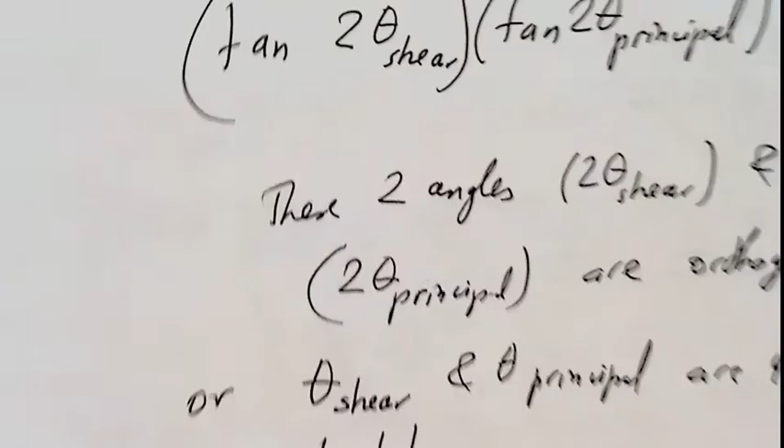We take an element. An element is under plane condition, meaning all stresses are in one plane: sigma x, sigma y, and tau xy. They are in one plane. Then tau maximum equals, in terms of initial stresses sigma x and sigma y and tau, the square root of sigma x minus sigma y over 2 squared plus tau xy squared.

Now, a student was wondering that this was not, as I did in lecture 21, half the difference between principal stresses. But if you go just to the next page, from page 2020 to 2021, I wrote maximum stress in that condition and minimum stress.

And I suggested, let us calculate for fun. You may say, okay, this is not fun, but let us calculate this: sigma first minus sigma second. I did not write sigma 1, sigma 2 -- sigma 1, sigma 2, sigma 3 are reserved for principal stresses in space.

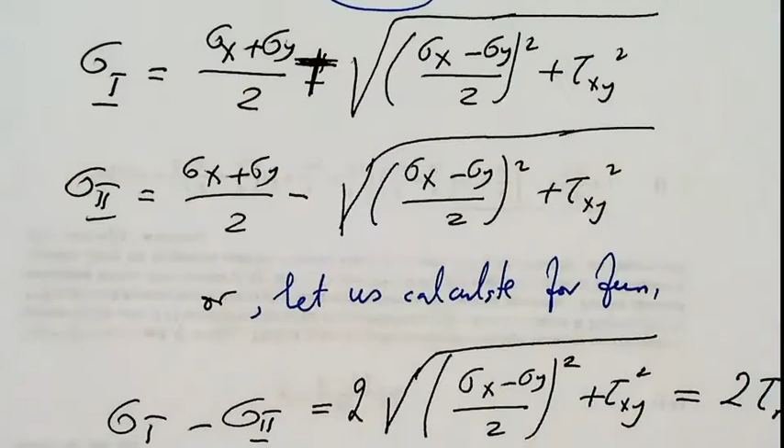So sigma first minus sigma 2 equals this, minus times minus, this will be 2 times this expression. But 2 times this expression is 2 times tau max that was obtained on the previous page. So tau max equals sigma first minus sigma 2, divided by 2.

Second question that was discussed: a project question. Was, do I need determinants in problem 1 of project 2? Or maybe, just maybe, there is another way. That is the question.

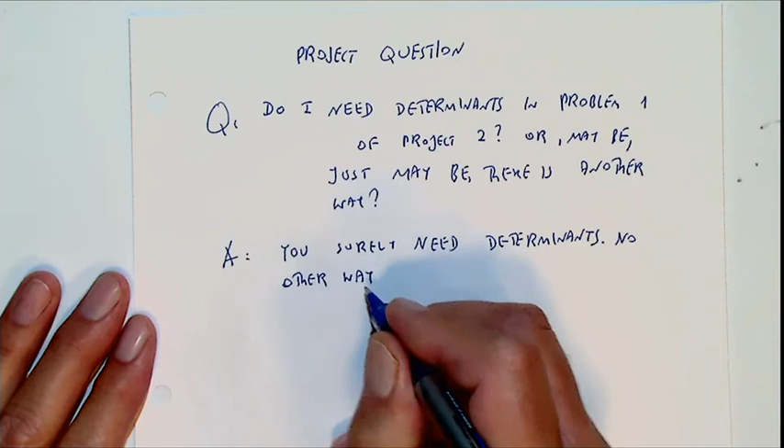Answer: you surely need determinants. No other way known to me. Of course, one can try the method of substitution, the method of expressing one unknown through others. But this is a tedious way.

Good for determinants: good for 2x2 equations, or 3x3, or even 4x4. That is for an experienced person.

But not for 8x8 determinant. Okay, why 8x8? Another question, so it's question 2. It's question 1.

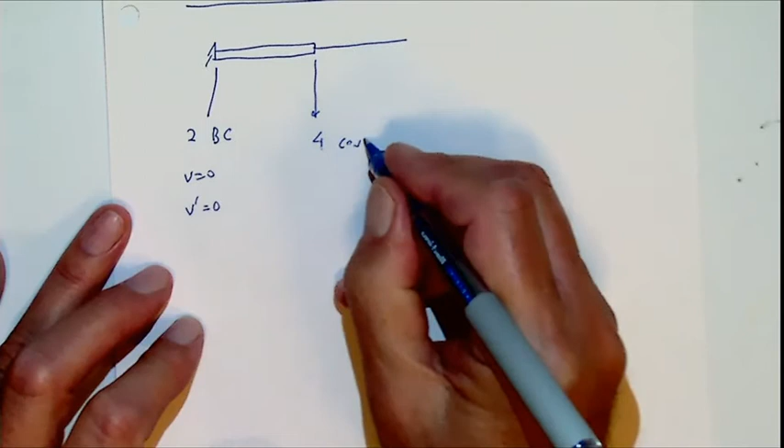Here we have 4 continuity conditions. That is V on left equals V on right. Then V prime, that is continuity of displacements. I will write down continuity of displacements. V prime left means to the left of this cross section, just V right, continuity of slopes.

Then, let us imagine this is EI1, and that is EI2. Then continuity of shear forces, EI1 V third derivative equals EI2, V left, V right, third derivatives, continuity of shear force.

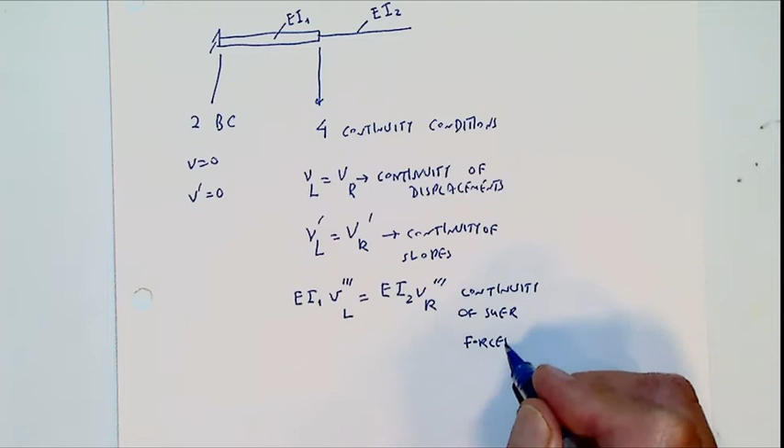Then EI1 V left double prime equals EI2 V right double prime. Continuity of bending moments.

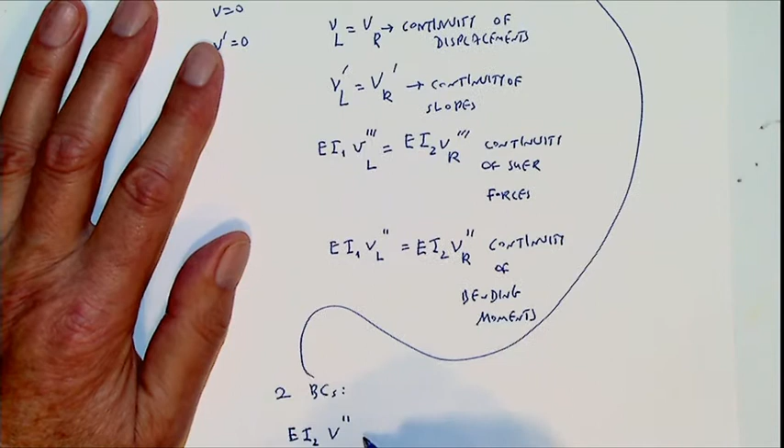So the 2 plus 4 is 6. Now we have here conditions, boundary conditions, 2 boundary conditions. And that is bending moment equals 0. EI2 V double prime, so that is at L, equals 0.

And then effective shear force equals 0. And that is EI2 V triple prime L plus P V prime L equals 0. Don't forget this term. I used it for free end.

So in total then we get 8 conditions. In total, 8 equations with 8 unknowns.

Okay, a question, how to evaluate, okay, before that, how to proceed? Assume I know how to evaluate determinant. For a moment. You may say, come on, I cannot assume that, but assume for just one moment.

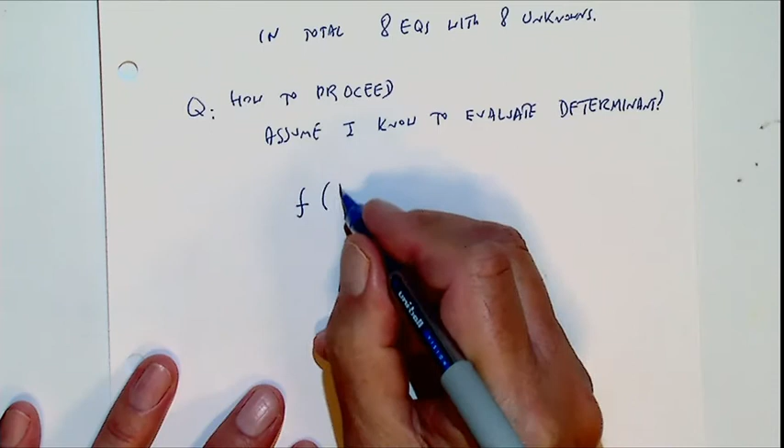Okay, so this whole determinant, let us call it F. Unknown is P. So what we have to solve is this is our equation. How to solve it?

Graphically. So I take this, that is P, that is F of P. So I evaluate determinant for P1, let us say P1. So that is P1, you take your value, okay? So then I evaluate F(P1).

Imagine that is positive. Then F(P2), that is P2. F(P2), imagine that is also positive. Then P3.

Imagine that is negative. That means that curve behaves, it's not important how it behaves, but main thing is that it crosses this axis. Okay, once you found this P2 and P3, then my recommendation is then to these intervals that you have to cut by 2.

Okay, then imagine this average. Calculate there, that is P4. Calculate F(P4). If it is negative, that means that root is to the left, etc. Then you proceed and you find this root. So that is graphical solution.

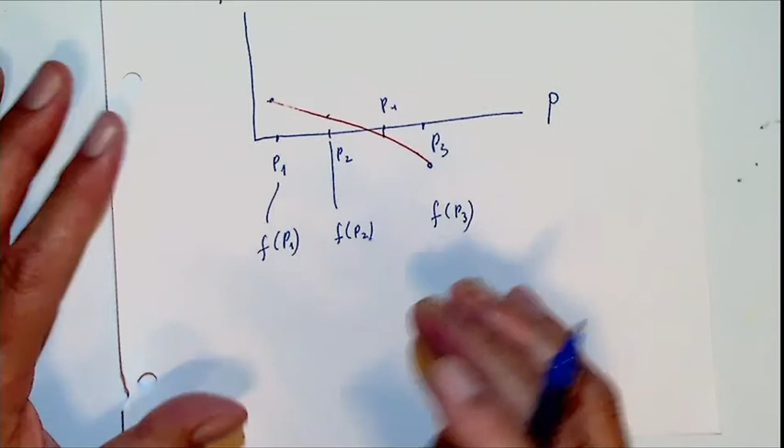Now you need to choose P1. Everyone chooses as he wants or she wants. Now how to evaluate determinant? Main question.

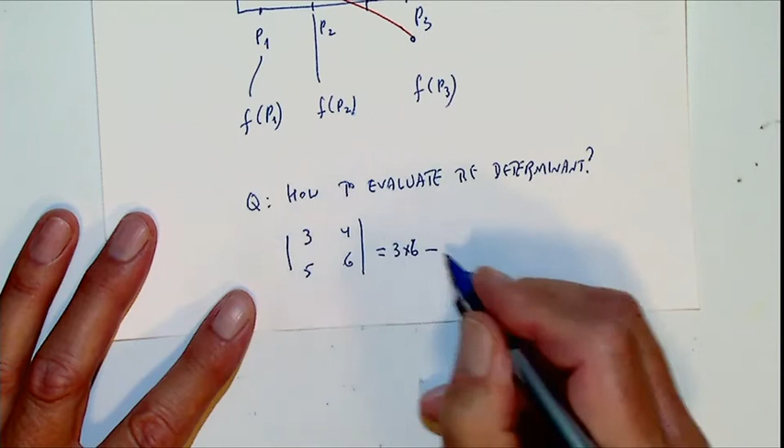Okay, we know, of course, how to evaluate determinant when we have a 2 by 2 determinant. Okay, 2 by 2 we know. 3, 4, 5, 6, so that equals 3 times 6 minus 4 times 5. We also know how to evaluate determinant that is 3 by 3.

1, 2, 3, 4, 5, 6, 3, 2, 1. So then we are using Sarrus' rule. Okay, so this on main diagonal 1 times 5 times 1. Then this plus 2 times 6 times 3. Then plus this one plus 4 times 2 times 3. Then minus terms, these ones. 3 times 5 times 3, etc. Then these ones. But what about 4 by 4, and 5 by 5?

Or 5 by 5? So we go to His Excellency computer.

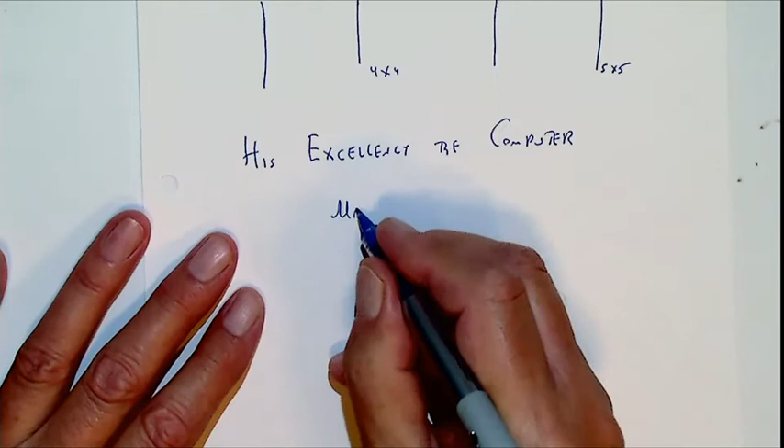Two ways, MATLAB. So you evaluate, you choose P1, go to MATLAB, evaluate F(P1), and you put on your figure. Okay, so F(P1) by MATLAB, F(P2) by MATLAB, etc.

Okay, if you want, you can also evaluate via Maple. You can say, come on, I did not study Maple. But it is easy as 1, 2, 3.

You are using help in computer within Maple. FAU has Maple everywhere. On your private laptop, it may not exist. You should go through FAU. And you are using help, you can study this in half hour. I'm promising you. And once you will learn Maple, you will never give up. But MATLAB is also as good.

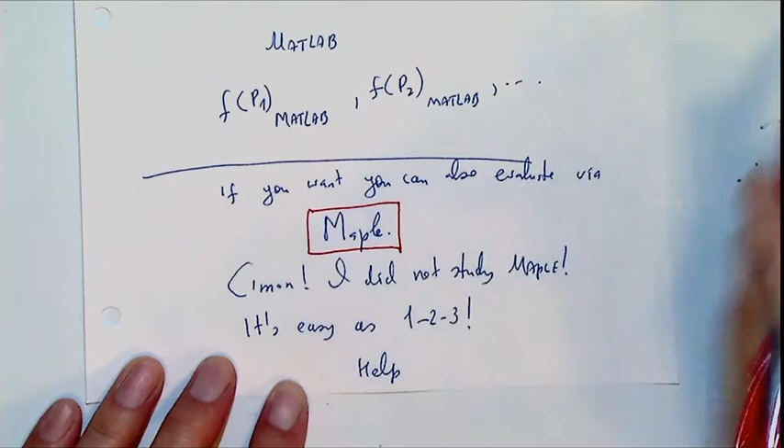Thank you. I answered these 2 questions that there were. I will put these answers also at the end of my lecture notes, I will add this, okay? At the end, not in the beginning, despite the fact that I'm doing it in the beginning. Otherwise, some people maybe don't need this explanation, and therefore, I do not want to start with this, and they may find that maybe I did not give the lecture or something like that.

Okay, so we go to 21.

So we had 21. I think we covered 17 pages, 21, 17. Okay, let me show you this. I think we covered until page 17, 21, 17, which is the second theory of strengths.

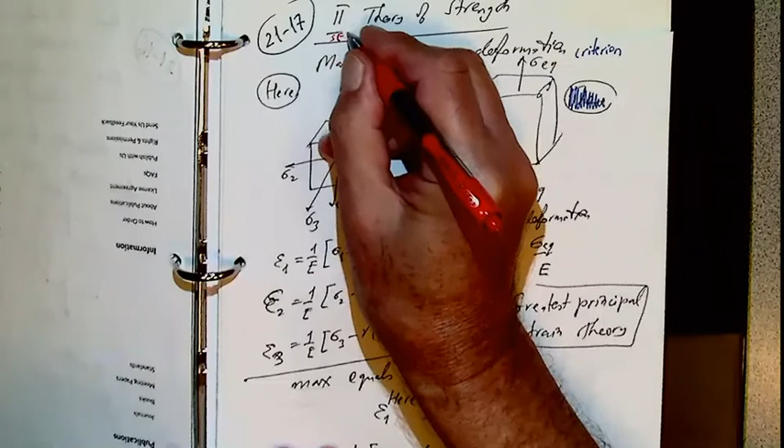Maximum linear deformation criterion, okay? Again, second criterion. I wrote this specially to again give up this notion that it is a theory. It is a criterion, it comes from the head of someone. I will give you later, towards the end, historical background of who gave what, just for you to know. Also, it is good for this knowledge to be exhibited to your boss when you are working in the company. It develops a culture in the company of knowing who did what and where it comes from.

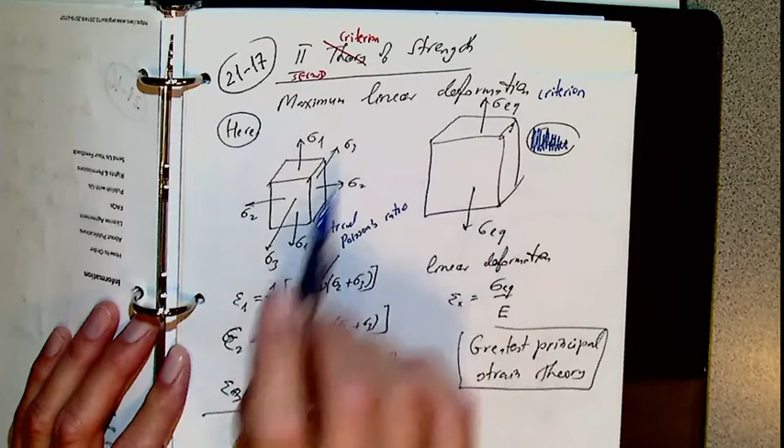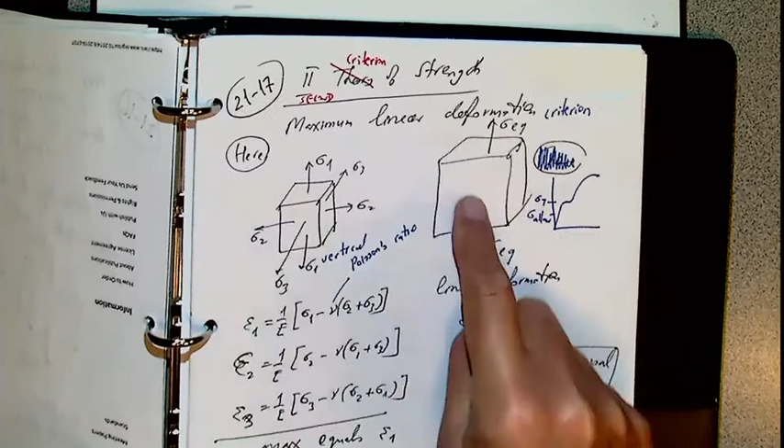So we have this situation where we have principal stresses: sigma 1 is vertical, sigma 2 horizontal, and sigma 3 also horizontal. Now, do you remember, we say that is our hypothesized state in uniaxial direction. In uniaxial direction we know from experiments, we conducted experiments, we know sigma yield, and we know that is sigma allowable, through safety factor. So what we say, according to this theory, maximum linear deformation in this element and maximum linear deformation in that element are equal.

So in direction 1, we have epsilon 1 equals 1 over E times sigma 1 minus nu, Poisson's ratio, times sigma 2 plus sigma 3. Then epsilon in direction 2 equals 1 over E times sigma 2 minus nu times sigma 1 plus sigma 3. Epsilon 3 equals sigma 3 minus nu times sigma 2 plus sigma 1.

But this is maximum of all, because sigma 1 is the biggest of sigma 2 and sigma 3. So epsilon 1 here equals epsilon 1 there. So 1 over E times sigma 1 minus nu times sigma 2 plus sigma 3 equals sigma equivalent over E. From here we get sigma equivalent: sigma equivalent equals sigma 1 minus nu times sigma 2 plus sigma 3.

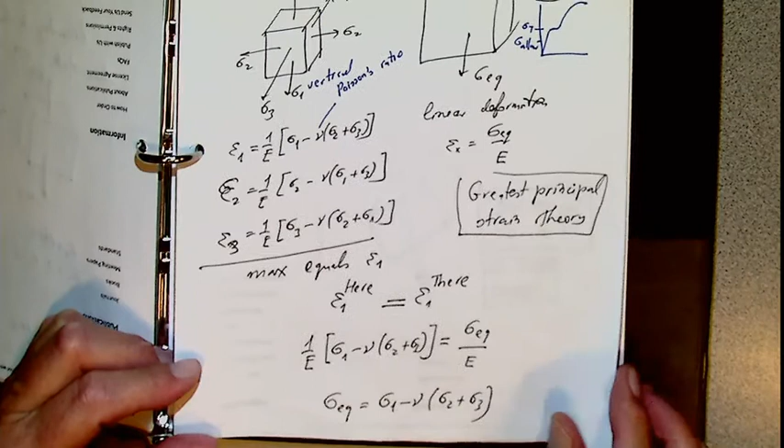Okay, now principal stresses, let me show you again, just for explanation, principal stresses. In the original axis we have various stresses, and I left this out to fill now. So there is sigma z, sigma x, sigma y, then there is tau.

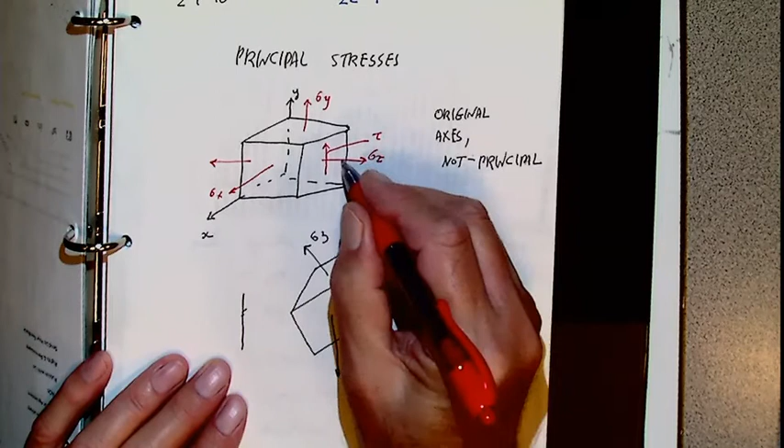Tau is shear stress. First index gives what face this is perpendicular to, that's z. Second index is direction, that's y. Then there is another one, tau again z but in x direction, etc. So there are many stresses. We can show that if we rotate the coordinate system, there will be some coordinate system where shear forces will not be present.

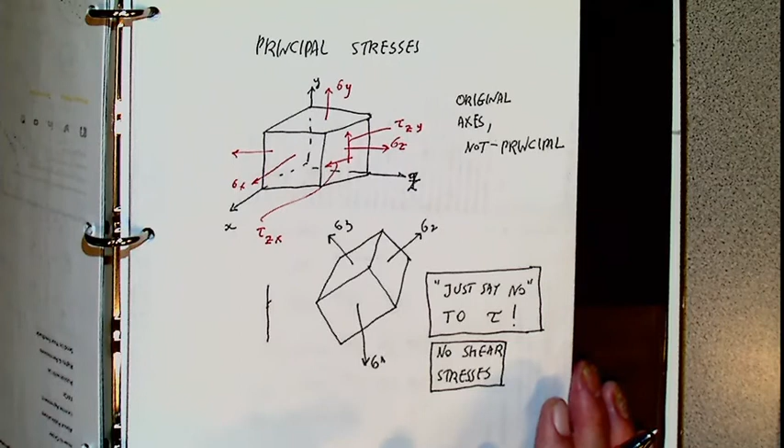Okay, so sigma 1, sigma 2, sigma 3, shear forces are not present. Just say no to tau. That is like Shakespeare's Romeo and Juliet: two families, Capulets and Montagues, are enemies of each other. Romeo is not invited to Juliet's party. So here, just say no to Romeo, or tau. So no shear stresses here.

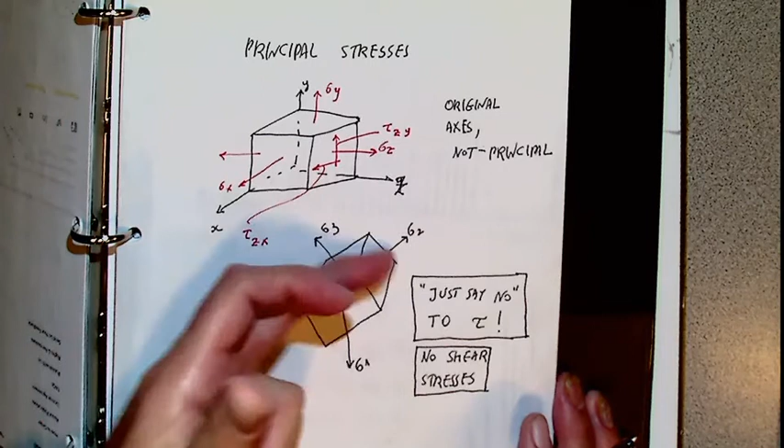Then we have only normal stresses, sigma 1, sigma 2, sigma 3. They are called principal stresses, and the biggest principal stress of them is sigma 1, smallest is sigma 3, whatever is left is sigma 2. That is 22,1. Okay, then 22,2.

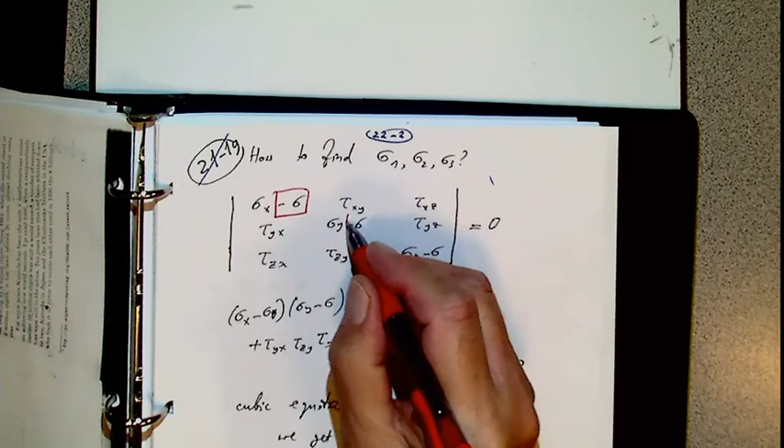How to find sigma 1, sigma 2, and sigma 3? Pay attention. In the original state we have sigma x, tau xy, tau xz, tau yx, sigma y, tau yz, tau zx, tau zy, sigma z. So what we do is subtract sigma from the diagonal elements and consider this determinant. So then we get a determinant - see, determinants show up again, like Romeo showing himself at Juliet's party.

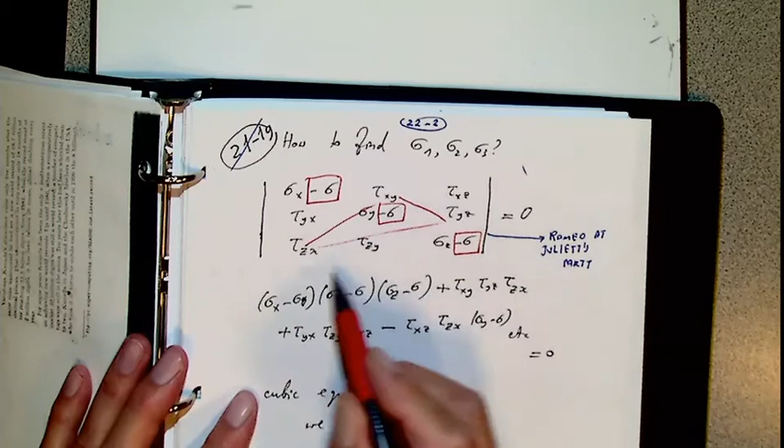Okay, then we can calculate easily: sigma x minus sigma, times sigma y minus sigma, times sigma z minus sigma. Then these elements, product of tau xy, tau yz, tau zx, then tau yx, tau zy, tau xz, etc. Then minus tau xz, tau zx, sigma y minus sigma, etc. We get a cubic equation - why? Because there is sigma, sigma, and sigma. We get a cubic equation, so it has three roots: sigma first, sigma second, sigma third. I'm using Roman notation because 1, 2, 3 I will be using for something else. Then sigma 1 is the maximum. So the solution usually is numerical, usually numerical solution.

Of course, there is a formula for cubic equations. There is a solution by Cardano's formula.

Do you remember Cardano, who was born in 1501? He was an astrologer and predicted that he would die in 1576. The day comes and friends ask him, Cardano, you're the greatest scientist on the entire planet, and you could not predict? He takes poison and dies.

That is terrible. We are different from Cardano. We stay at home in order to fight coronavirus.

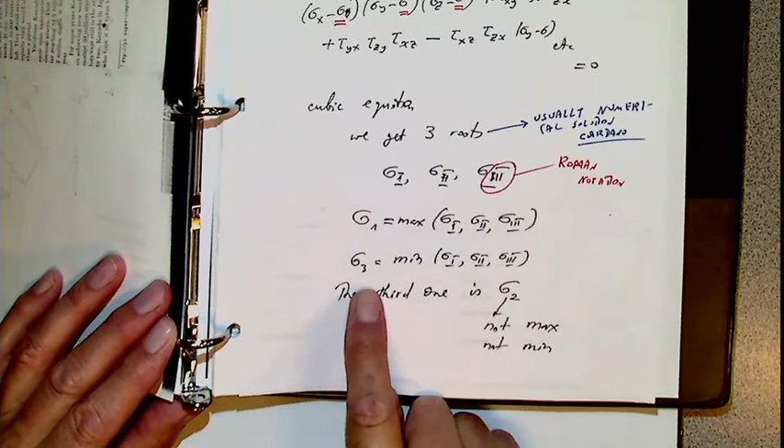So sigma 1 is the maximum. Sigma 3 is the minimum of these three. And whatever is left, the third one, is sigma 2. Not max, not min.

Okay, 22.2. Now will be 22.3. I thought that I would cover this last time, but therefore I numbered, maybe prematurely. I shouldn't have numbered. Probably in the future I will not number any pages ahead of time.

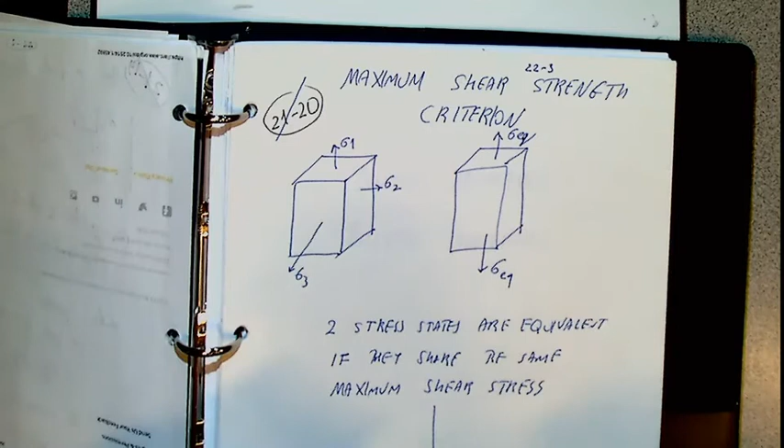Usually we had chalk here, and I could just pick it up. So if you take this chalk and twist it in opposite directions, this chalk suddenly will... we take this chalk and we twist it like this. Okay, we increase the force, increase the force. Then at some point this chalk will break.

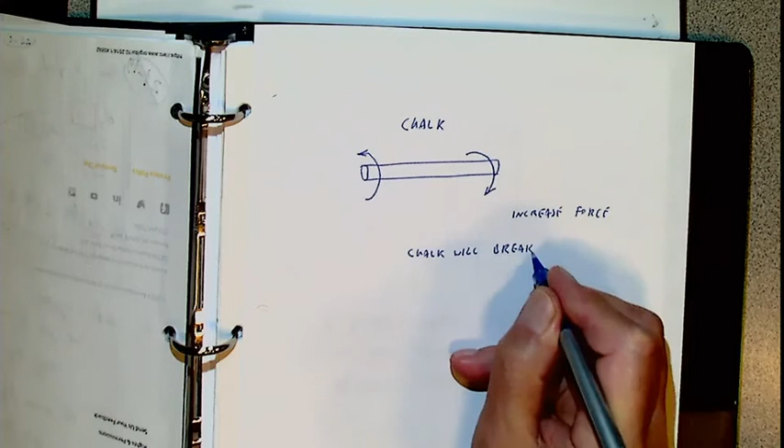Then I would ask students, where does it break? I was asking students, do you think it will break? They said, of course, you are a strong man. Where will it break? Okay, nearly middle. How? Usually the breakage was happening like this. Look, please.

Here, in some approximation, I would ask students, what is the approximate angle? Approximately, they would say 45 degrees. Then I say, look please, not maximum stress decided, but something else decided. So shear stress decided.

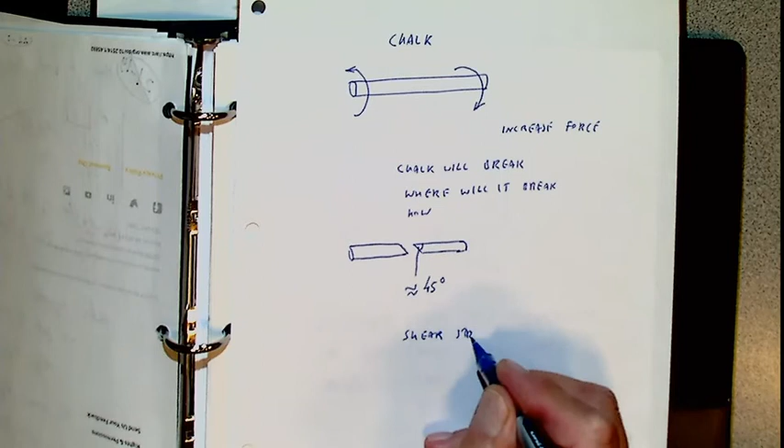That is 22.3b. So I'll write A. Then two stress states are equivalent to each other if they share the same maximum shear stress. So maximum shear stress will be acting in this plane, sigma 1, sigma 3, and it will be sigma 1 minus sigma 3 divided by 2.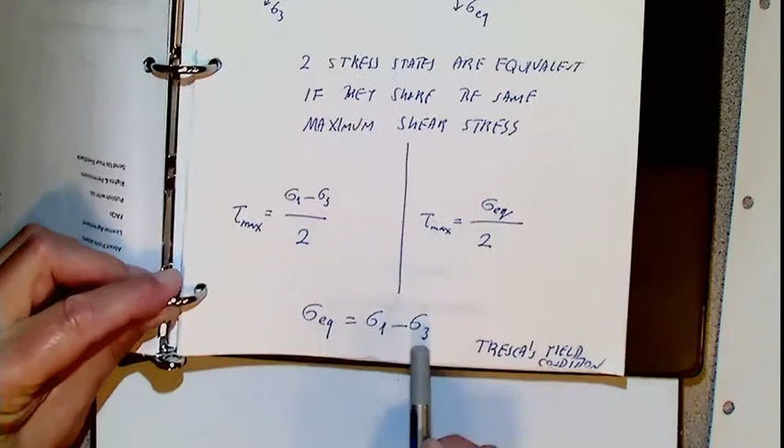Tresca says, pay attention, what is the difference between all these criteria? Let us start with 1. The first criterion was maximum normal stress criterion, that is sigma 1. But then we said, come on, there is no sigma 2, there is no sigma 3. Are they unimportant? Are sigma 2 and sigma 3 second-class citizens? Let us say, yes, in that theory they are considered unimportant. Here suddenly sigma 2 is unimportant, but sigma 3 is not. But at least that is an improvement over the sigma 1 criterion, because suddenly sigma 3 plays some role.

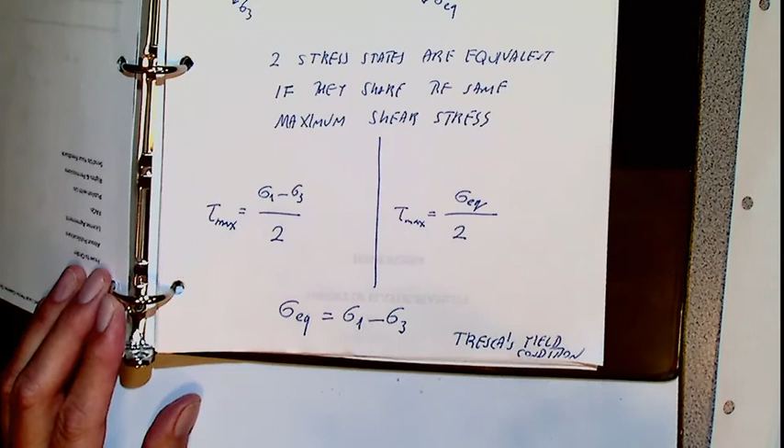We will get to the place where sigma 1, sigma 2, and sigma 3 will all be playing a role. Actually, today, when we discussed the maximum linear deformation criterion, all 3 are present - they are all invited to the dinner.

So the main thing, which one to adopt, is experiment - accumulated experience of approximately 100 years. Not more than that, I would say. Approximately 100 years of experience we have. But humankind, for 20 centuries, so to say, did not know this. Oh, why 20? For millions of years, did not know this.

Okay, this page we don't need at this moment. Now we will deal with some other issue, which is 22.4.

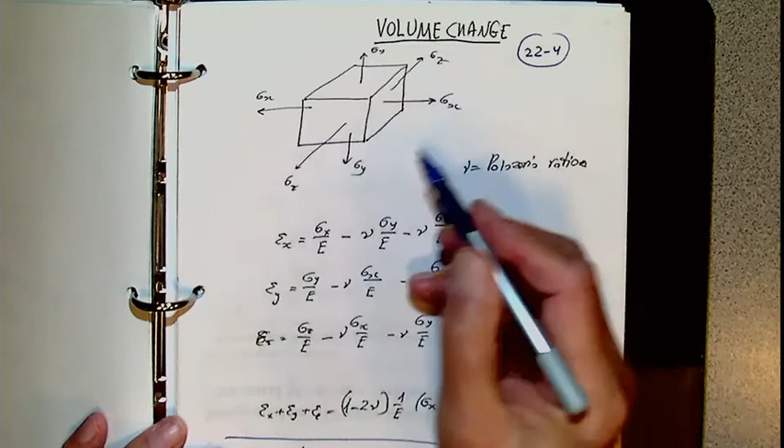In order to get where we want to get, we need to consider volume change. Look, we have sigma 1, sigma 2, sigma 3, or sigma x, sigma y, sigma z. They are the same because there is no tau here. So epsilon x equals sigma x over E minus nu times sigma y over E minus nu times sigma z over E. Let us consider further.

Let us sum all of these strains. So sigma x appears once, but it is multiplied by 1, but 2 times nu, minus nu and minus nu. So minus 2 nu over E sigma x. The same for sigma y: sigma y will be here with 1, and sigma y appears here and here, so minus 2 nu. Then sigma z appears here, that is 1, and then here and here.

So then, let us calculate volume change. These deformations are actually connected with changing of volume. Let us illustrate this. In the beginning, the volume was dx times dy dz. That is initial volume.

Dx changed by deformation: dx becomes dx times 1 plus epsilon x. So that is the value after deformation. dy changed into dy times 1 plus ey. dz changed into dz times 1 plus ez. Pay attention, you had to study this in strength of materials in the previous course. That is part of curriculum. However, I'm repeating it because who knows, maybe you did not study, and even if you did study, then it is a repetition.

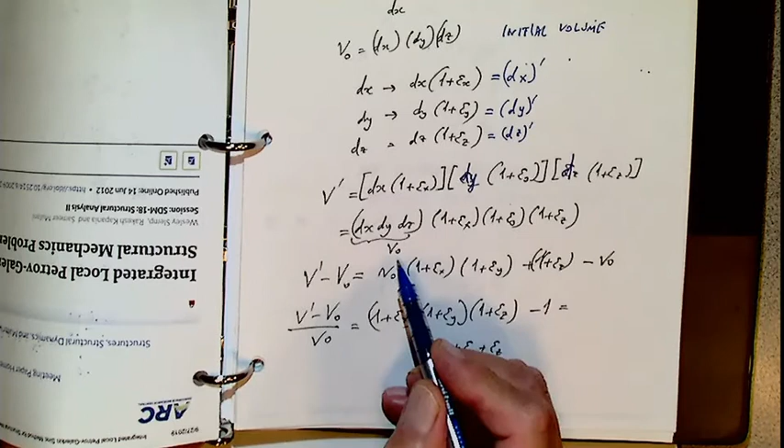So then v prime, the new volume, will be the product of these three things: dx prime, the new length in x direction, dy prime, the new length in y direction, and dz prime, the new length in z direction. That is dx times 1 plus epsilon x, dy times 1 plus epsilon y, and dz times 1 plus epsilon z, the product of these three. So then the previous volume dx dy dz comes out, multiplied by 1 plus epsilon x, 1 plus epsilon y, 1 plus epsilon z.

Let us subtract the previous volume from the new volume: v prime minus v0. That is v0 times 1 plus epsilon x, 1 plus epsilon y, 1 plus epsilon z, minus v0. Okay, let us find relative volume change. V prime minus v0 over v0 will be, look, 1 plus epsilon x, 1 plus epsilon y, 1 plus epsilon z minus 1, because v0 was taken out and we divided by v0. So that is what is staying.

And then, look, this 1 times 1 times 1 is 1, 1 minus 1 gives 0. Then there is a sum, epsilon x plus epsilon y plus epsilon z when I multiply. And then there are some other small terms, like epsilon x times epsilon y plus epsilon x times epsilon z plus epsilon y times epsilon z. Then there is epsilon x epsilon y epsilon z. These are all small because deformations themselves are small. Product of small quantities is much smaller than sum of the quantities.

So 22.4, 22.5. Okay, pay attention. So, because that is from the previous page, I will say previous: epsilon, v prime minus v0 over v0, equals epsilon x plus epsilon y plus epsilon z. Then I can calculate from here, I can sum up, and that is what I obtained already: 1 minus 2 nu, over E, times sigma x plus sigma y plus sigma z.

Okay? Did you write? I'm sorry that you are not sitting here, and COVID-19 affected us so much. It separated us, but we are together. You are in your homes, without music, without TV, without movies. I very much hope... I'm watching you virtually. No, I'm not watching you. I'm just saying that I'm watching jokingly.

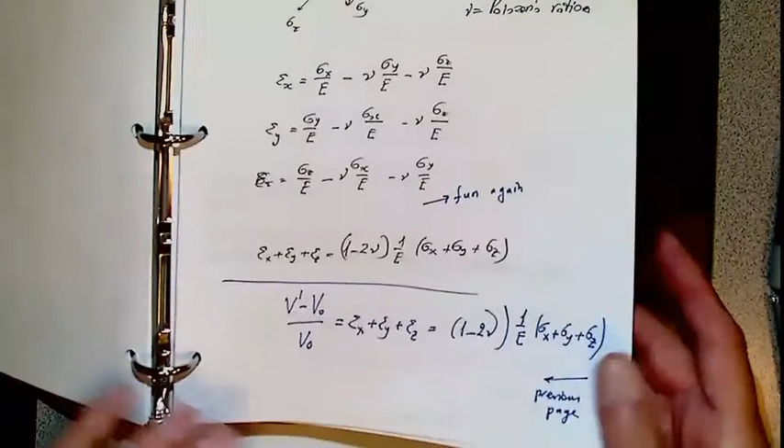Okay, now if all stresses are positive, meaning all tension, then naturally the volume increases. Then volume change should be positive. That means that 1 minus 2 nu should be positive. If these stresses are positive, then this term is positive, so this should not be negative at least. 1 minus 2 nu is 0 or positive, or 1 is bigger than or equal to 2 nu, or nu is smaller or equal to half. That is, Poisson's ratio cannot be more than half for isotropic materials.

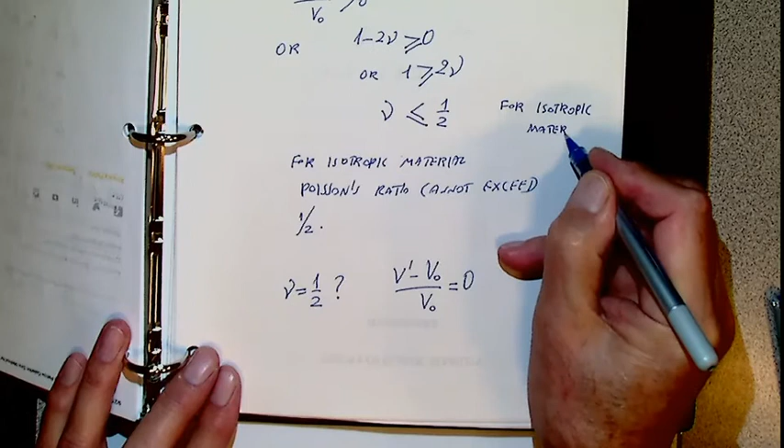Now, what is isotropic material? I have a sheet, then I'm taking this specimen, and this specimen, and this specimen, and then I'm subjecting them to the tests. Then I get E1, generally speaking, E2, E3, okay, that is in this part. And isotropic means E1 equals E2 equals E3, a constant. Material parameters are constant in every direction. Material constants are material parameters that are constants in every direction.

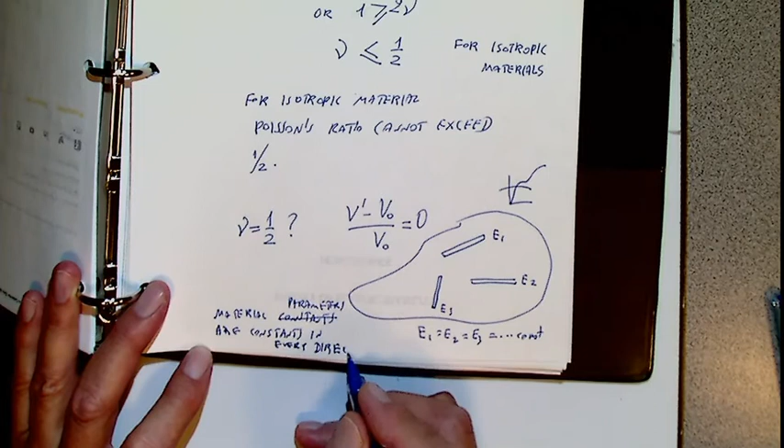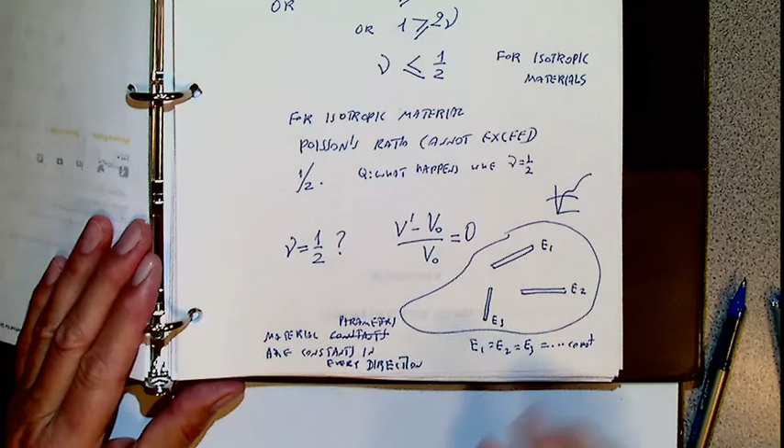For isotropic material, Poisson's ratio cannot exceed half. What happens when nu equals half? Then volume change is 0. We are extending in every direction, but volume does not change.

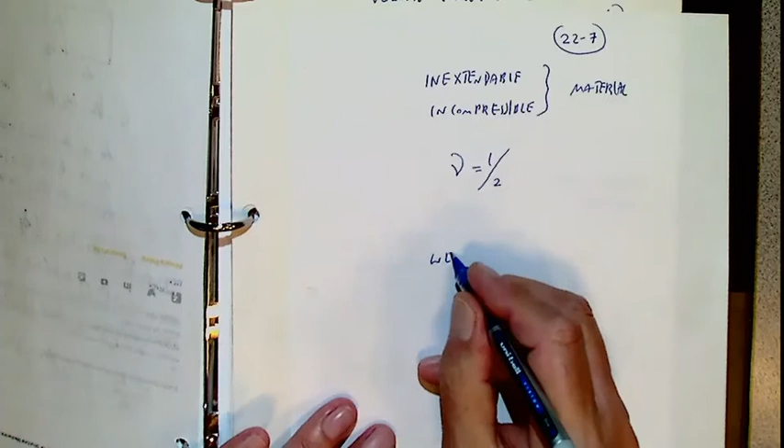So we should say that such a material is inextendable, or incompressible material. Nu equals half. We will remember this and put it in our brain. We will need this information.

Any questions? Okay.

Now pay attention, until now how many theories, how many criteria did we have? Maximum normal stress criterion, maximum linear deformation, and then maximum shear stress. Okay, that is 1, 2, 3.

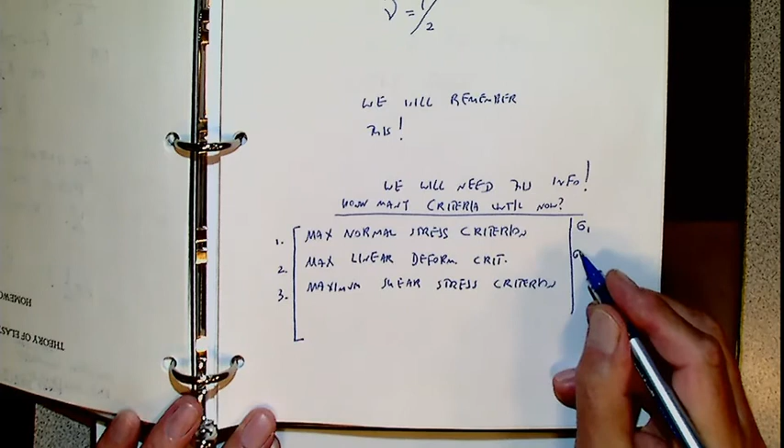Here only sigma 1. Here is sigma 1 minus nu times sigma 2 plus sigma 3. Here is sigma 1 minus sigma 3. That is sigma equivalent. So here there is only sigma 1, here is all 3, here is 2.

Now we will introduce a fourth criterion, which we will not be adopting. But in order to get to the fifth criterion, which we will be adopting, we have to deal with the fourth. So that is 22.8.

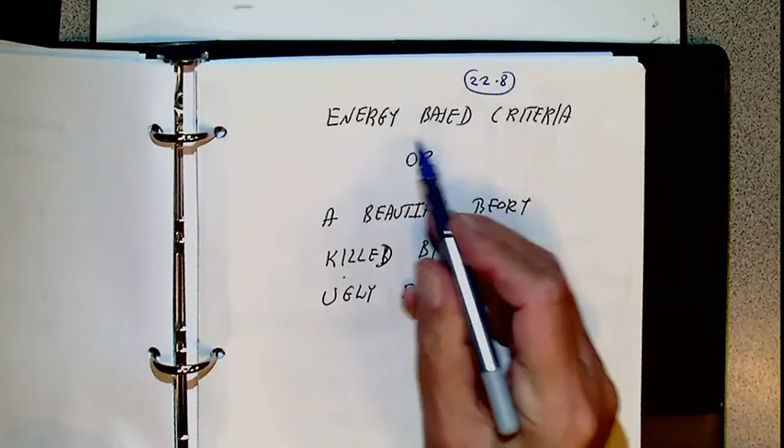Energy-based criteria, okay? Or a beautiful theory killed by an ugly fact. This was said by Thomas Huxley, a British biologist. He said, a tragedy of science: a beautiful theory killed by an ugly fact.

So we will deal with such a theory. What we mean here is that science is based upon many various theories. Some theories do not satisfy experiments. Such theories are thrown away, they are killed so to say. We just discard them, we don't use them.

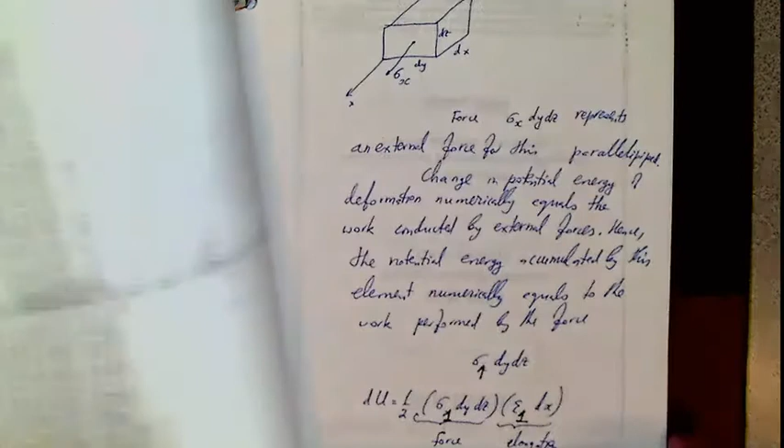Okay, 22.9. So in this particular case, that is Beltrami, an Italian engineer. Beltrami's criterion, that is 22.9.

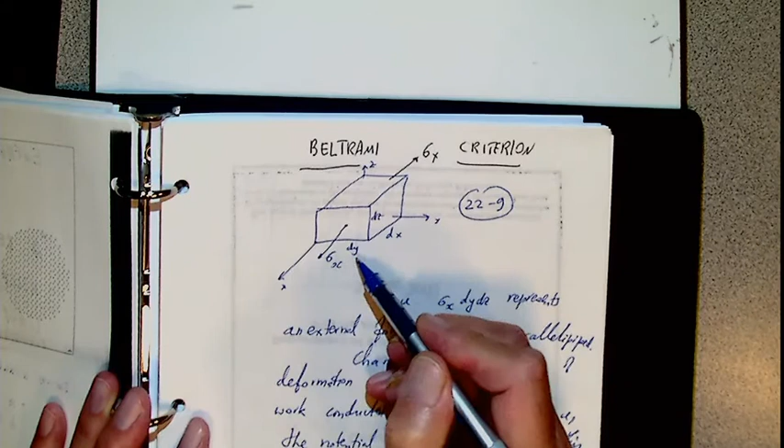So look please, we have this coordinate system, with y and z. In x direction, there is some sigma x acting, a force, which is a stress. In x direction that is dx, in y direction dy, in z direction dz. So sigma x acts upon the area dy times dz.

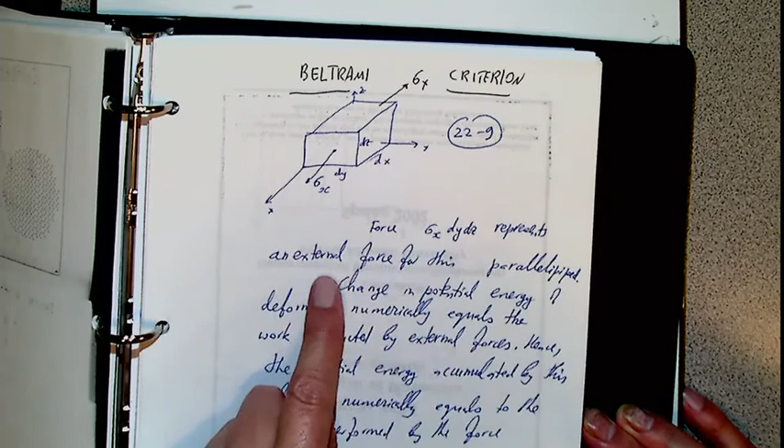So there is a force, that is a stress. Stress is a force over area, so to calculate the force itself, we multiply the stress by the area. Force sigma x times dy dz represents an external force for this parallelepiped. So that is this parallelepiped, and change in potential energy of deformation.

As a result, this element accumulates some energy. Change in potential energy of deformation numerically equals the work conducted by external forces. There is no other way, we don't have friction or anything else, we consider an ideal situation. Hence, the potential energy accumulated by this element numerically equals the work performed by this force.

Let us say, I denoted here sigma x, but we will take sigma 1. du equals 1/2 sigma 1, and along dx, with deformation, dx will change into epsilon 1 dx, which is elongation. So we get 1/2 sigma 1 epsilon 1 dx dy dz, which is a volume. Why 1/2? Because we are increasing sigma from 0 to this value, and epsilon changes from here to here.

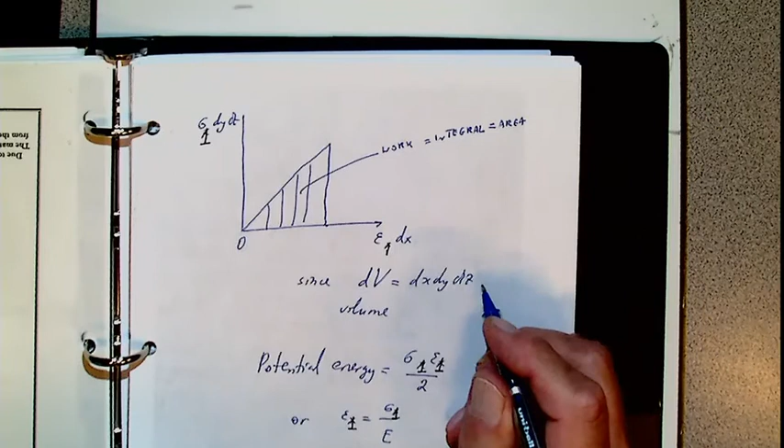Therefore, that is this work. Work equals the integral, or area. So then that is a volume. So what we get actually is potential energy, du equals 1/2 sigma 1 epsilon 1 dV. And that is density of potential energy, density meaning potential energy per volume.

Look please, there is no book anywhere in any language which introduces this topic as I'm introducing it, because I would like you to understand rather than give you a recipe. And that is how it is, that is how it's usually done. So energy, which is potential energy per volume, equals sigma 1 epsilon 1 over 2, or if I substitute instead of epsilon 1, sigma 1 over E, that is Hooke's law.

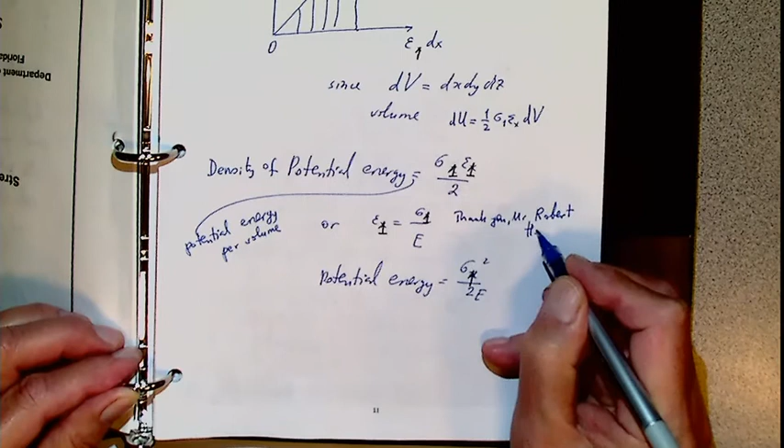Thank you, Mr. Robert Hooke. You see, I told you already the story, that Robert Hooke contradicted Sir Isaac Newton on one issue. Sir Isaac Newton was a president. He did not do what Pythagoras did, he did not say, throw him overboard from the ship. But what he did, as a member of the Royal Society of England, was order all of Robert Hooke's portraits, which were in various places in Cambridge, in Cambridge University, to be burned.

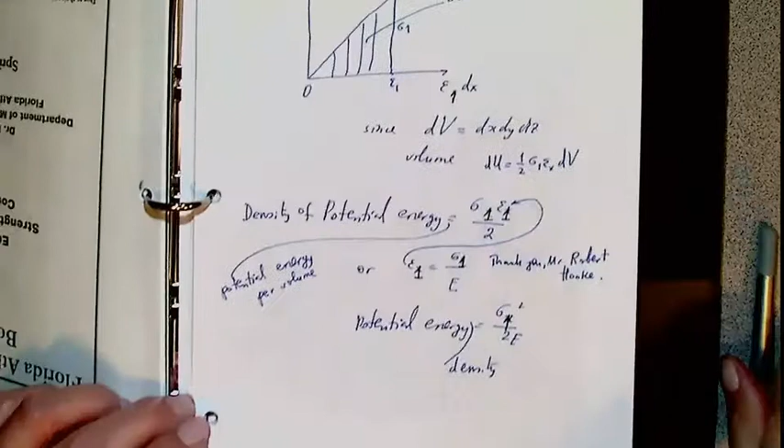Then 22.11. If all stresses, assume no shear stress are acting. If all stresses are present, then potential energy change will be 1 half, not just sigma 1 epsilon 1, but also sigma 2 epsilon 2 plus epsilon 3 sigma 3.

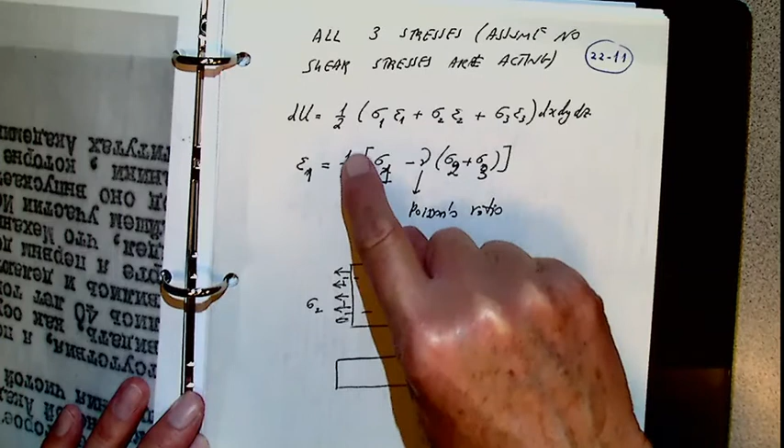Okay? Then I have to substitute epsilon 1 equals 1 over E, sigma 1 minus nu times sigma 2 plus sigma 3. That is generalized Hooke's law.

So Hooke's law was given by an Englishman, Hooke, and this was given by a Frenchman, Poisson. So two guys over the English Channel gave us this law.

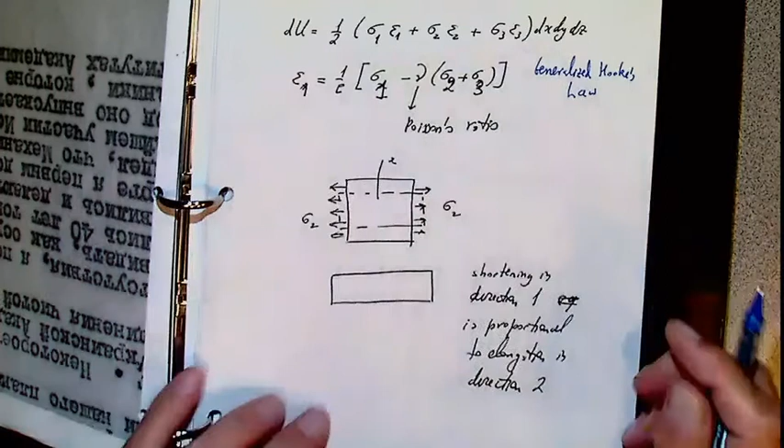So then what does that mean? When there is sigma 2, then there is deformation also in the x direction. It becomes shorter. So that is minus nu sigma 2 over E. Shortening in direction 1 is proportional to the elongation in direction 2.

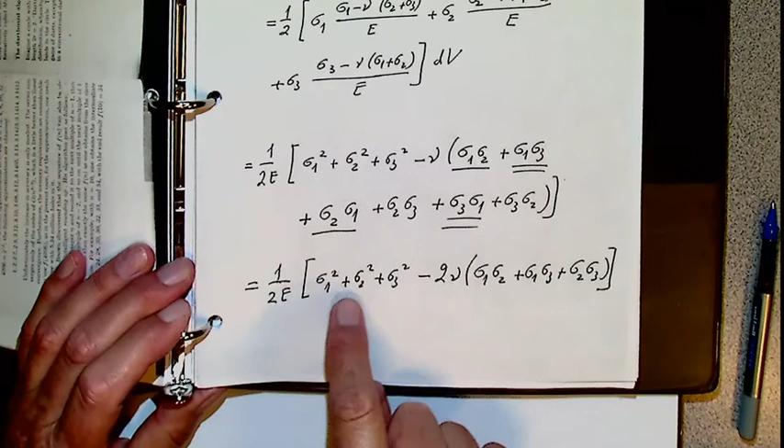Then we get sigma 1 squared plus sigma 2 squared plus sigma 3 squared, that is here. Then minus nu, but pay attention: sigma 1 sigma 2 and sigma 2 sigma 1 are the same, so it will be not just nu, but 2 nu. Analogously these two are the same: sigma 1 sigma 3 equals sigma 3 sigma 1, and these guys are the same. So it will be minus 2 nu times sigma 1 sigma 2 plus sigma 1 sigma 3 plus sigma 2 sigma 3.

That is this. Now I think the next page comes from this book. Okay, we finish this derivation. 2212, 2213, I will write down here 2213, from Norton's book, Machine Design, Integrated Approach.

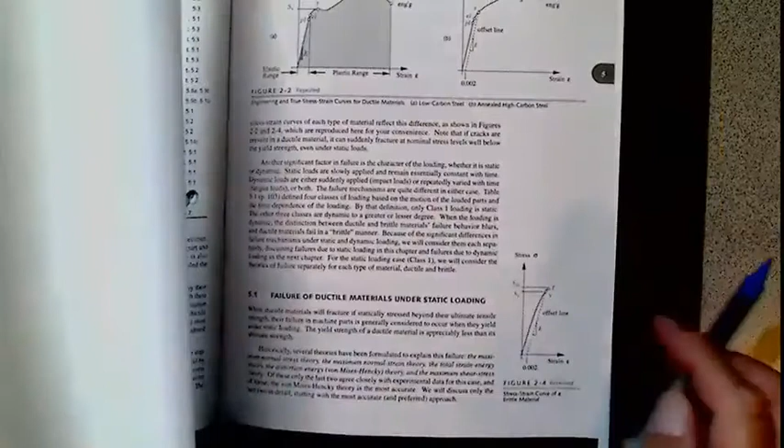2213, 2214. Okay, so here we need some phrases only. Historically, several theories have been formulated.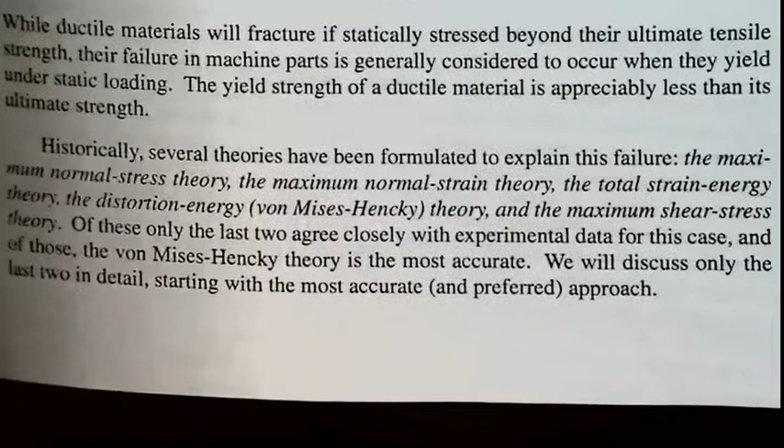Historically, several theories have been formed, but not theories, but criteria, yes? I'm revolted by the word theory because no one can explain with some theory why is that. That was a suggestion of these people.

To explain these failures: the maximum normal stress theory, that is one. The maximum normal strain theory, that is two. Then total strain energy theory and distortion, that is three. Maximum shear stress, that is three. There is now two coming: total strain energy theory. Total strain energy theory is like this.

I will write it down: total strain energy criterion. Beltrami, Italy, 1885, as far as I remember. I was not there, by the way, when this was discovered. I'm not that old.

So, what he says is that there is this situation: sigma 1, sigma 2, sigma 3. And there is this situation: sigma equivalent. Two conditions are equivalent to each other if total stored potential energy densities equal each other.

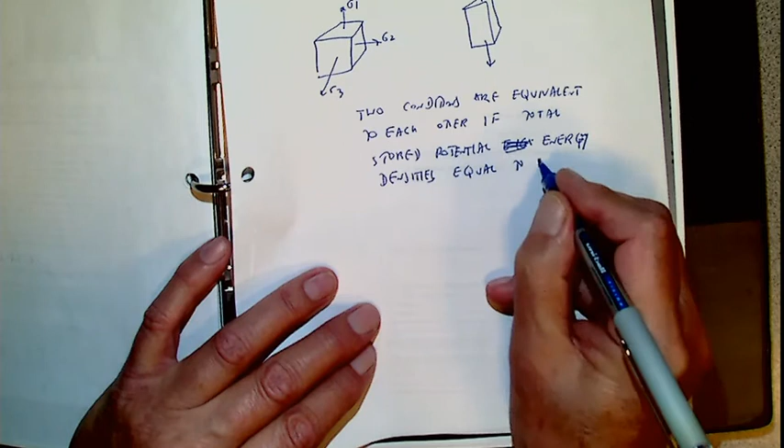Okay, this equals 1 over 2E, sigma 1 squared plus sigma 2 squared plus sigma 3 squared minus 2 nu, sigma 1 sigma 2 plus sigma 2 sigma 3 plus sigma 1 sigma 3.

Here it equals 1/2 sigma equivalent squared, 2E. When they equal each other, we get sigma equivalent squared.

Sigma equivalent squared equals sigma 1 squared plus sigma 2 squared plus sigma 3 squared minus 2 nu, sigma 1 sigma 2 plus sigma 2 sigma 3 plus sigma 1 sigma 3. Or sigma equivalent equals square root of sigma 1 squared plus sigma 2 squared plus sigma 3 squared minus 2 nu, sigma 1 sigma 2 plus sigma 2 sigma 3 plus sigma 1 sigma 3.

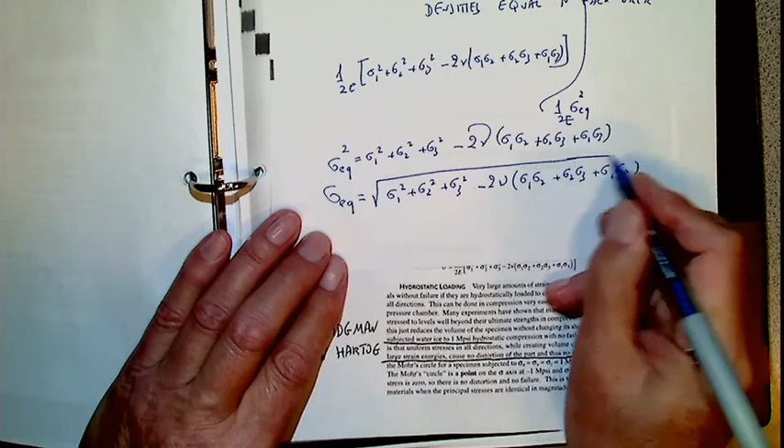Okay, so that was done in 1885.

Experiments did not support this criterion. Okay, this criterion looks very nice. All three looks nice. All three sigmas are included.

Looks very nice. People were very excited. Experiment did not support this criterion.

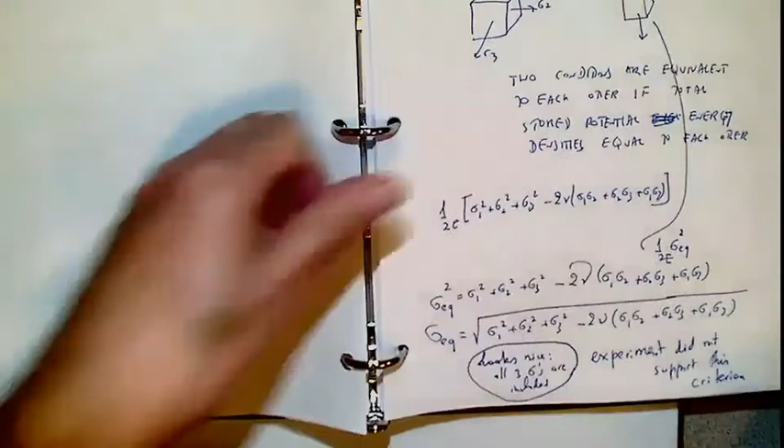Okay, I will describe the experiment. Any questions? Pay attention, I'm not going too fast. We have 9 more minutes left.

Experiment: so there was some very small element taken, and placed in water. So that is this element, and that is water.

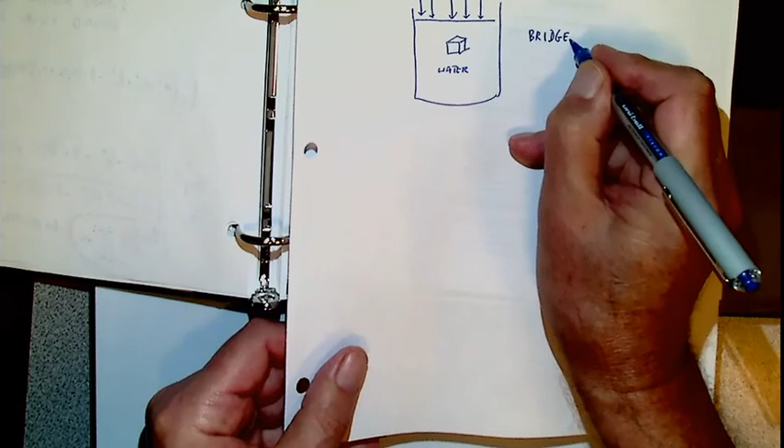And this element was pressed harshly. Okay? Bridgman. I think Bridgman, yeah, PW. USA. American experiments.

Okay, so pay attention. That is hydrostatic pressure, pressure from all sides. So sigma 1 equals this, and this. So sigma 1 equals sigma 2 equals sigma 3 equals minus P.

Okay, if this criterion is correct, when should the element fail? When should the element have failed? So that is when, pay attention.

So sigma equivalent equals square root of sigma 1 squared, which is minus P squared, plus minus P squared, plus minus P squared, minus 2 nu times sigma 1 sigma 2, minus P times minus P, plus sigma 2 sigma 3, minus P times minus P, plus sigma 1 sigma 3, minus P times minus P. That is under the square root.

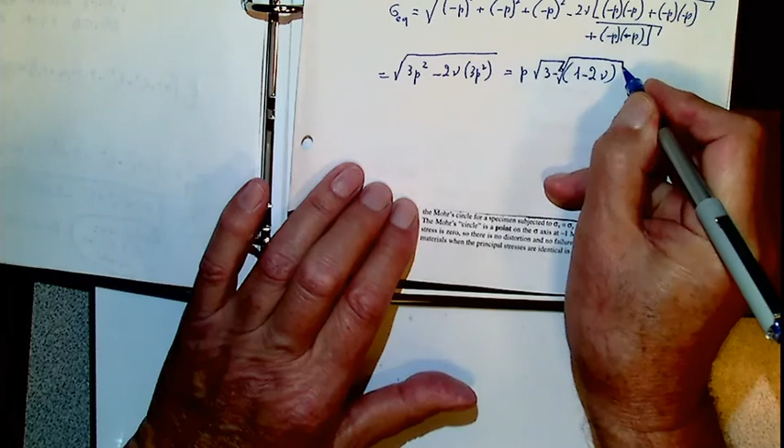Okay, then this should be equal to sigma yield divided by safety factor, required safety factor. But there's a but: the element did not fail at this stress. This means, look please, P equals, from here, sigma equivalent, sigma y, yield stress, divided by 3, times 1 minus 2 nu, and 1 over k required. It did not yield, so we can calculate that very easily, that is sigma yield.

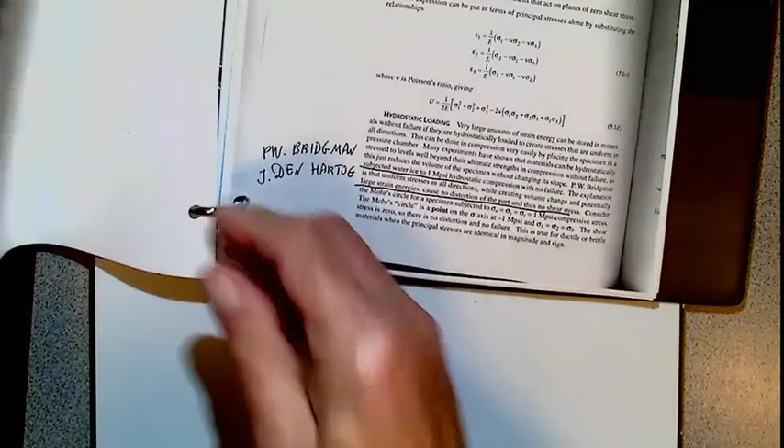Any questions? Okay, Bridgman.

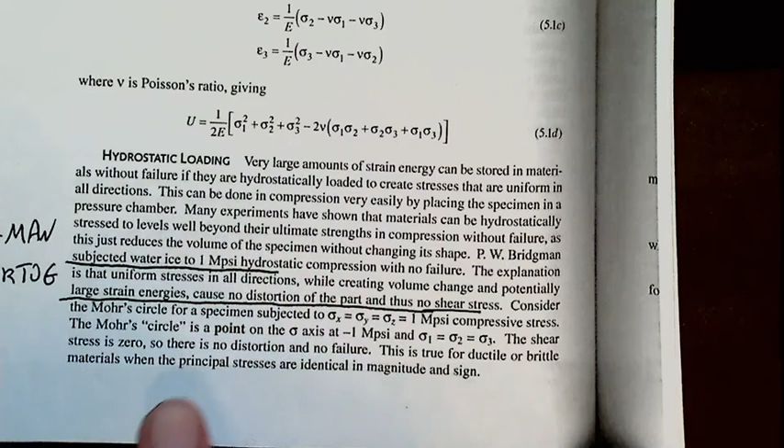Okay, so look please, Bridgman. United States comes into play as a young country. Yeah, he subjected water ice to 1 mega psi hydrostatic compression with no failure.

The explanation is that uniform stress in all directions, while creating volume change and potentially large strain energies, causes no failure.

So which means that, look please, by the way, analogously, in the 1930s experiments were conducted. And on the next page, I think he mentions, that is section 2216, 2217.

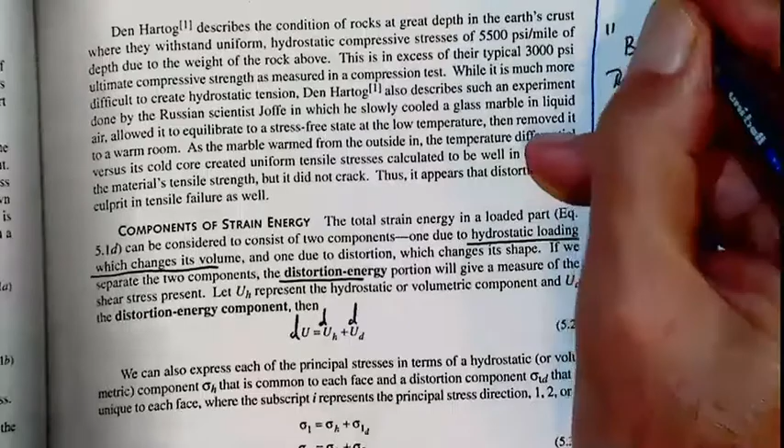Also another person, Den Hartog. Den Hartog. He is Dutchman, from the Netherlands, and later USA. He arrived in the United States in 1924 from the Netherlands.

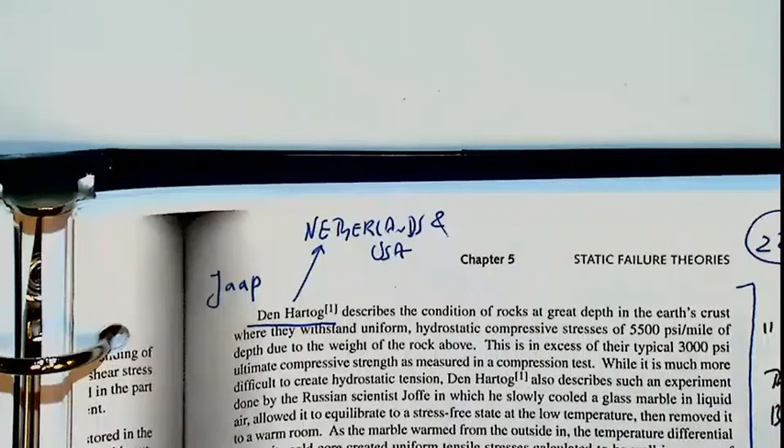By the way, I'm writing a historical paper, and I contacted Den Hartog's son, who passed away a year ago. He sent me his answer to my questions, and then after several months, passed away. Recently, from his granddaughter, Dorska, who lives in New Hampshire in the United States, I received albums, whole albums, of Den Hartog. I wrote her that I would copy what I wanted and return it. She said no, I loved your article so much, that is a gift from us to you. I will bring that album and show you a couple of pictures of Jaap Den Hartog.

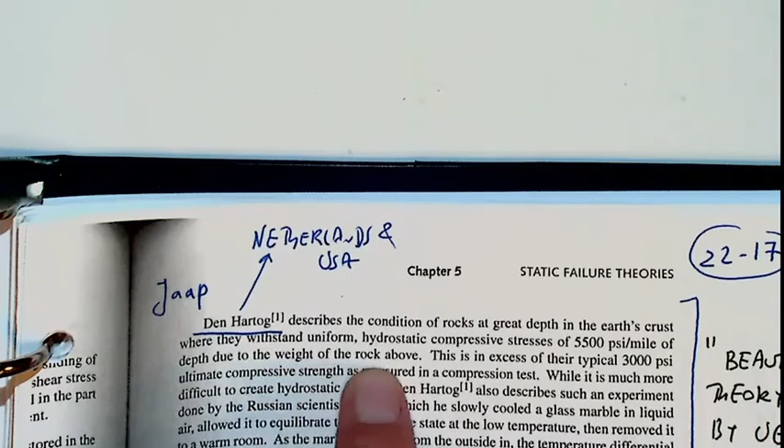So he also describes the condition of rocks at great depths in Earth's crust, where they withstand uniform hydrostatic compressive stresses of 5,500 psi over a mile of depth due to the weight of rock above. Look please, sometimes you don't have to do an experiment, you just have to think. Okay, and then you get the answer to your questions. So therefore, just sitting down and thinking is the best way of solving some problems, by reflection.

I think, therefore I am. This is in excess of their typical 3,000 psi ultimate compressive strength. Look, ultimate compressive strength is 3,000 psi, but they undergo hydrostatic pressure.